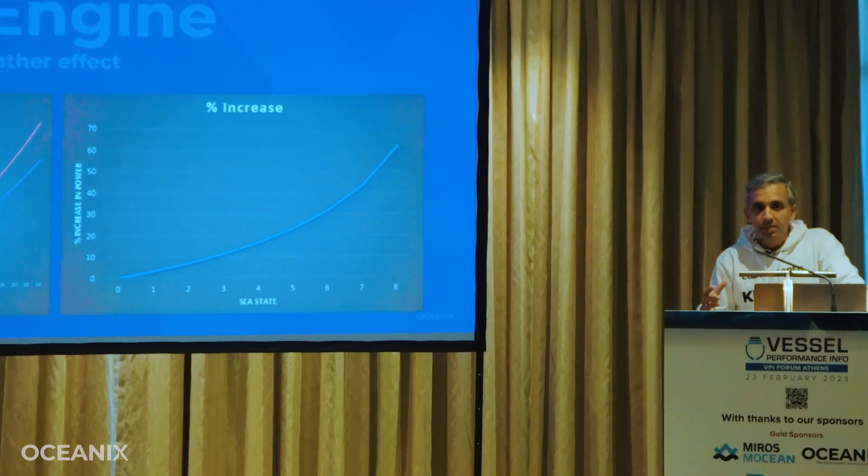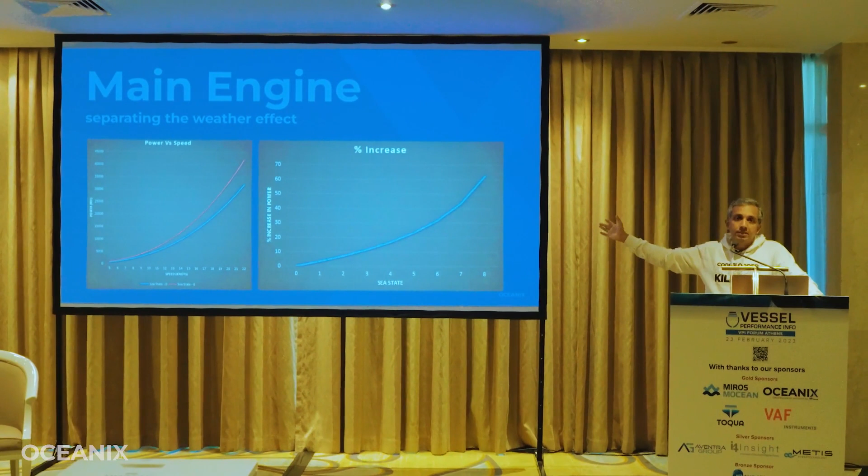So first we will try to understand how we can separate out the weather effect. There is a simple mechanism and there is a complex mechanism. The simple mechanism is you take the sea state as a number to represent it. So on the left side, you can see the effect on the speed power curve by sea state. The blue is sea state 0 and red is sea state 6. So there is a shift in that curve. If you take a specific design draft and a specific speed, you also see the increase in the power due to sea state, say 0% to 60-70% when it comes to sea state 6 or sea state 8. So this is very dependent on both speed and the draft.

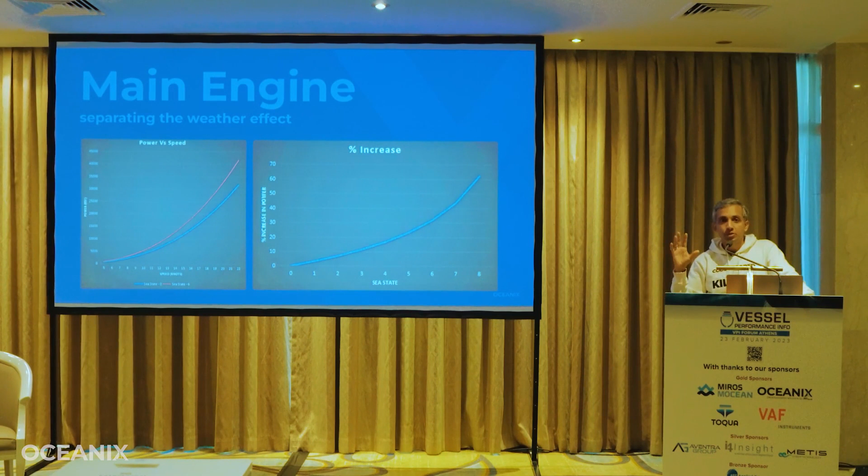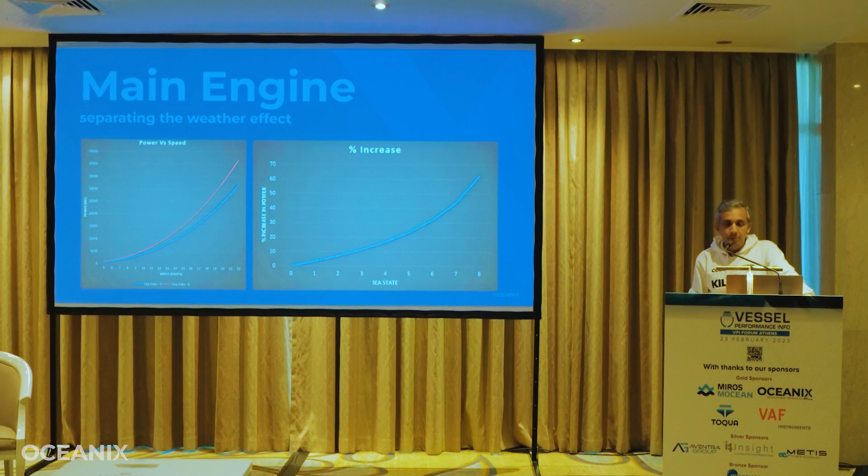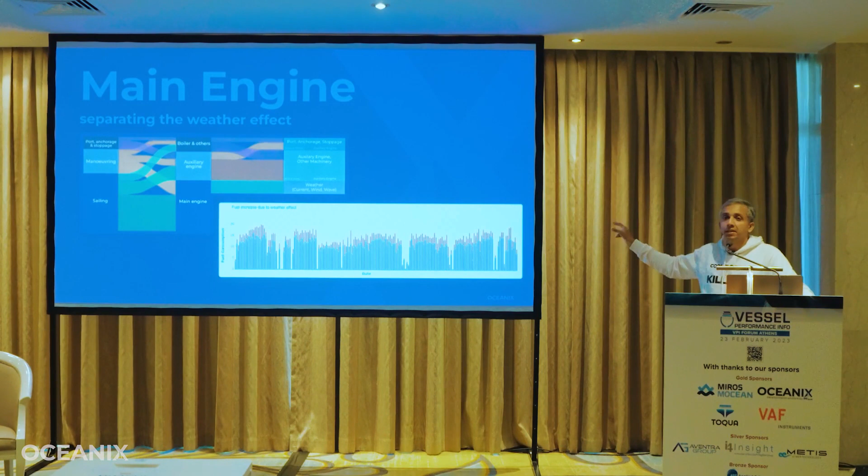You can add one more complexity by taking the actual wind speed and direction and the wave spectrum. I think the previous speakers have alluded to that. So every single day of the voyage, you compute this effective weather, which is shown in red. You aggregate all that for the whole year, and then you add up to find what is my main engine consumption due to the weather effect: the current, wind and wave.

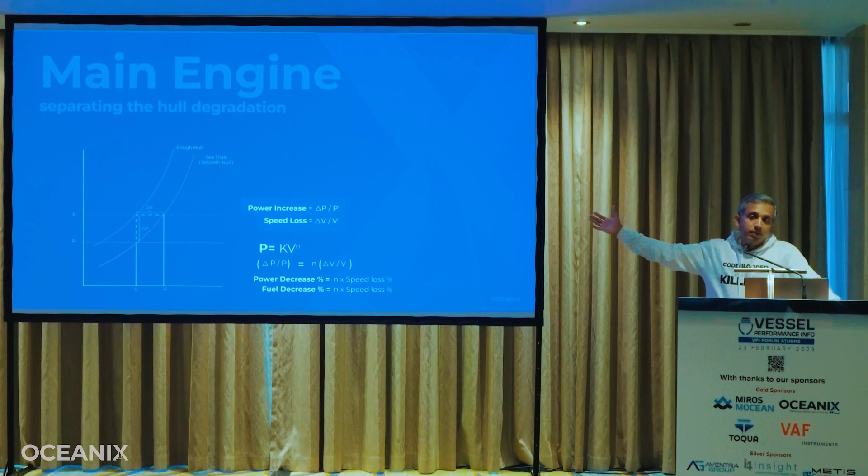So you know that block of fuel is due to this weather effect for the whole year. The same thing with regards to hull and propeller fouling. So we already know about ISO 19030 and how it helps understand the speed loss and understand the change in performance. So we may want to start from there, but then you have to go beyond ISO to find out what is the change in fuel because of that. So the change in speed is what is mentioned there. So you want to shift to the change in power and then the change in fuel thereby, so that you can find the difference in fuel due to the degradation.

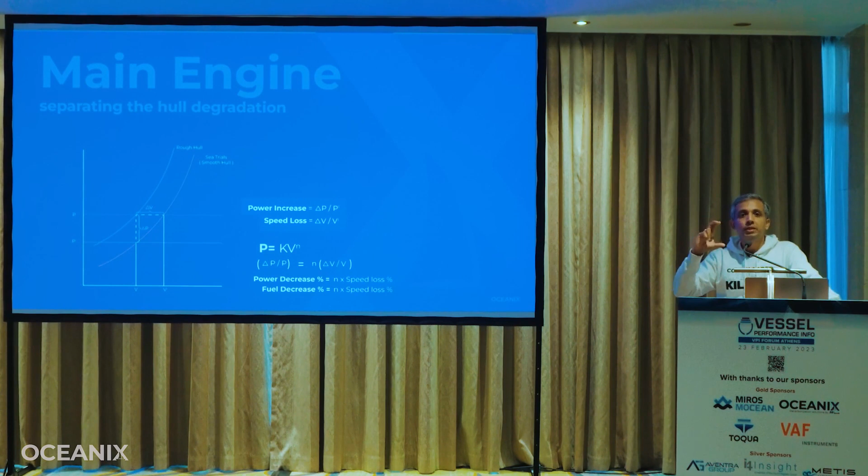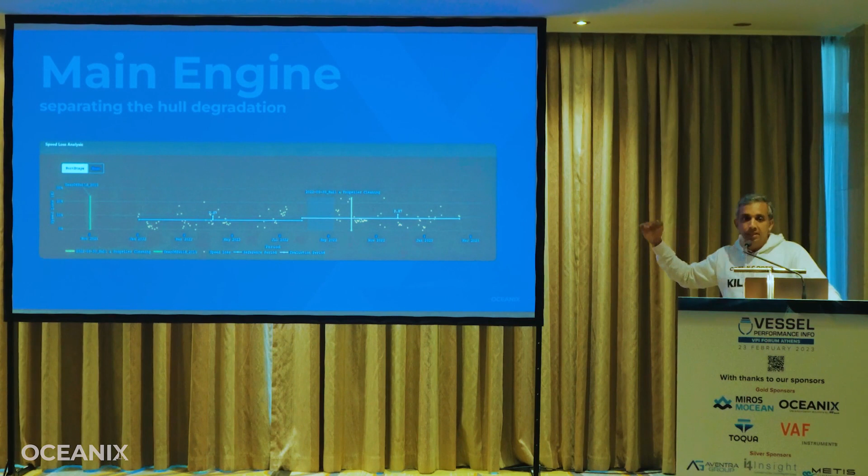And one way to measure this degradation is you plot it down and see the average for the whole year. This is one way. A bit more complex way is, instead of treating this as an average, the degradation will have a slope. So you find the slope and then you find the increased degradation, so that every single day you compute the effect due to degradation, add them all up. For the year you get the block of fuel which is purely due to the hull degradation.

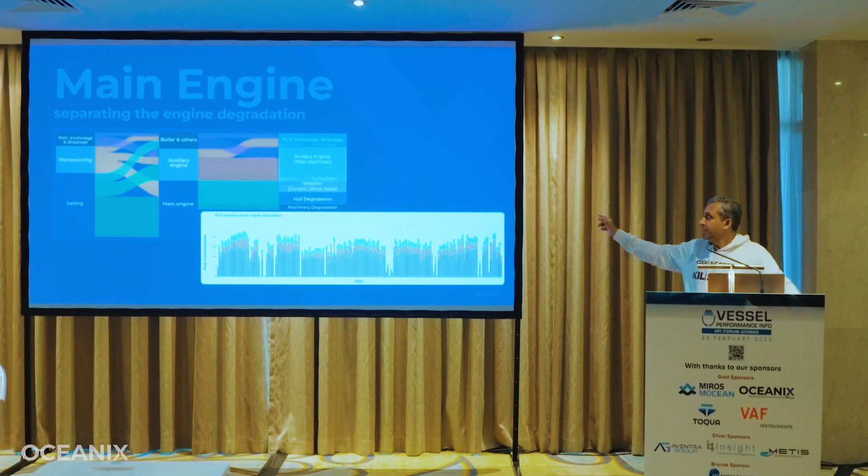Same thing you do for the engine. You monitor the SFOC values, you plot the degradation or shift in the SFOC curve, which is engine degradation. You compute that again for the whole year. The very small violet dots on top represent the main engine degradation, which you will add up for the whole year, and then you get that small part which is machinery degradation.

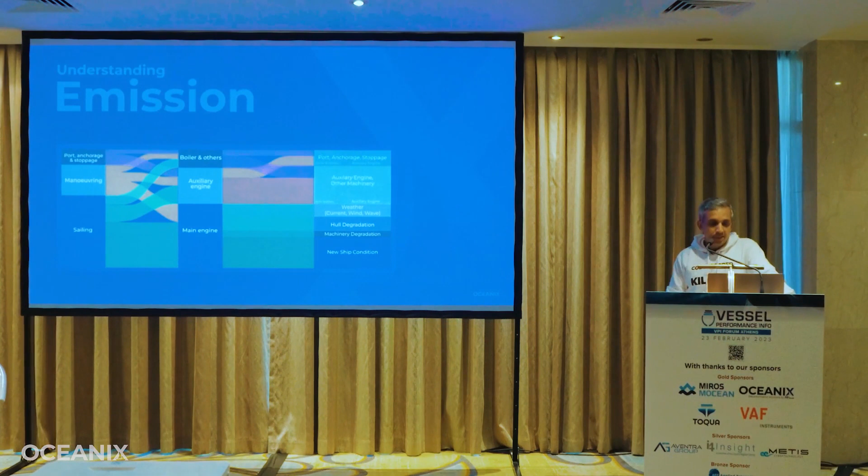So you get the three things separated out, which will tell you which are the three types of solutions you will work on. What remains actually is a new ship condition. So ideally, if you were a new ship, this is what your consumption should have been, going in a very calm condition. So this is the overall breakdown. Once you do, then you will know how you can address it.

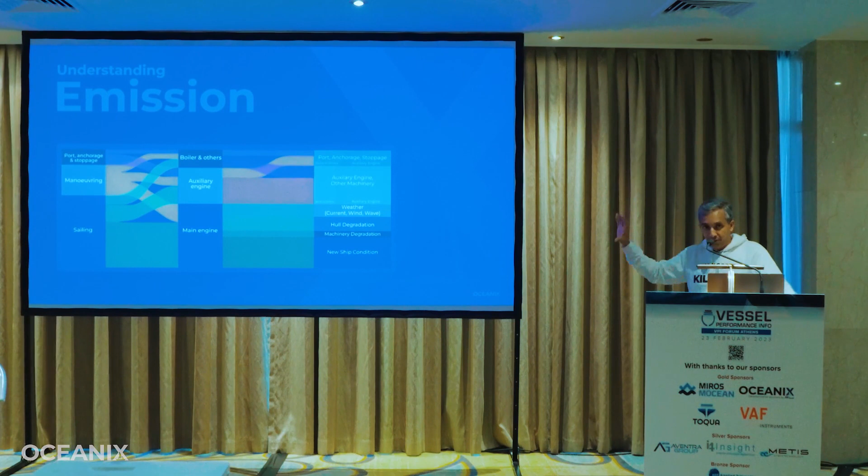The important thing is each type of vessel and each type of operation may have differences in these percentages on each of these blocks. That also helps you understand which area of decarbonizing solution you should focus on, and not broad-base apply the same solution across all your ships. You don't do that. You have to choose the most effective one because it has to give you the correct ROI. So finally we talk about the path towards decarbonization.

So if I quickly summarize, the top part was the port and anchorage. So how do you reduce that? Clearly one way is increasing that sailing percentage, or the auxiliary engine consumption in port you reduce by cold ironing and various mechanisms. This is a small part but may have some limitations because operational constraints are there. But then you also have the auxiliary engine in the sailing and maneuvering condition. You have to monitor the auxiliary engine condition, plus you also manage the load balancing and whether you are running more generators than necessary, etc. These things you can do and manage this consumption.

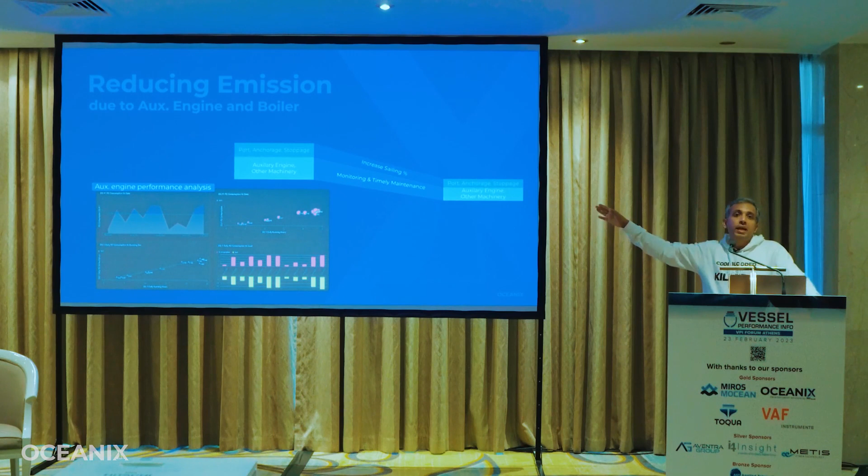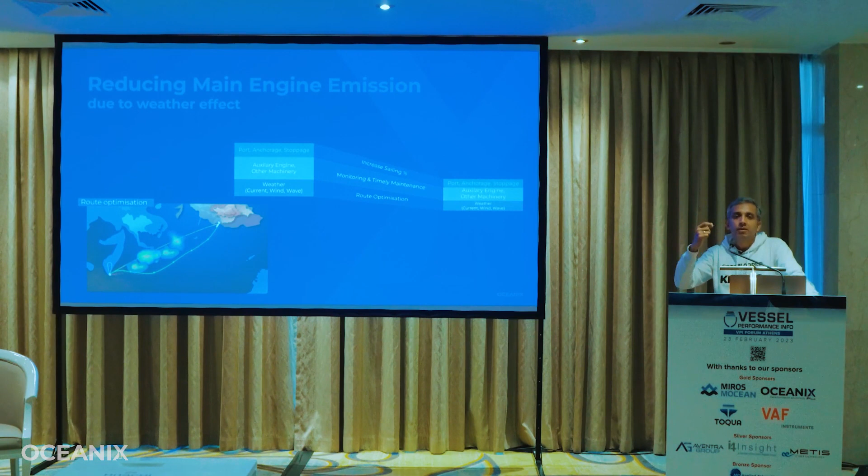Can you reduce the weather effect? Obviously route optimization is one way, but it can save a small part because eventually there is a commercial decision to go from place A to B. You cannot obviously wait for the weather to be calm. You can minimize or reduce that effect to some extent.

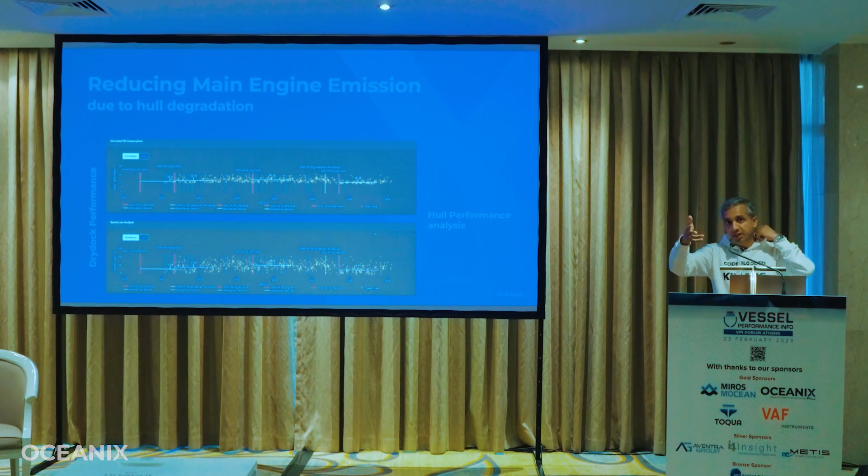Regarding the effect of hull degradation, you may want to monitor the whole thing. So there was an example where the dry dock itself was mentioned. So one way is to assess your latest dry dock compared to the previous one, or you could also assess how good the in-service performance is, like the first year versus the rest, which is what all the paint contracts are written on. So you might want to see this as a mechanism also. And also, when do you do the maintenance? So what we call a maintenance trigger.

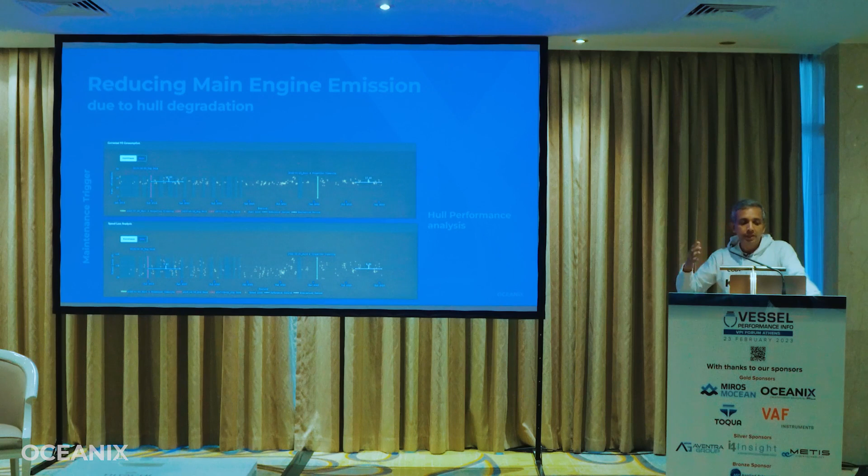So you check the first 3, 6 or 12 months compared to the latest 3, 6, 12 months and decide when you need a trigger. So this is all about hull performance monitoring, which may yield you some benefit in that hull degradation. You may be able to control it to some extent. The same thing with machinery: if you do engine monitoring and timely maintenance, that part of machinery degradation you may be able to manage and control.

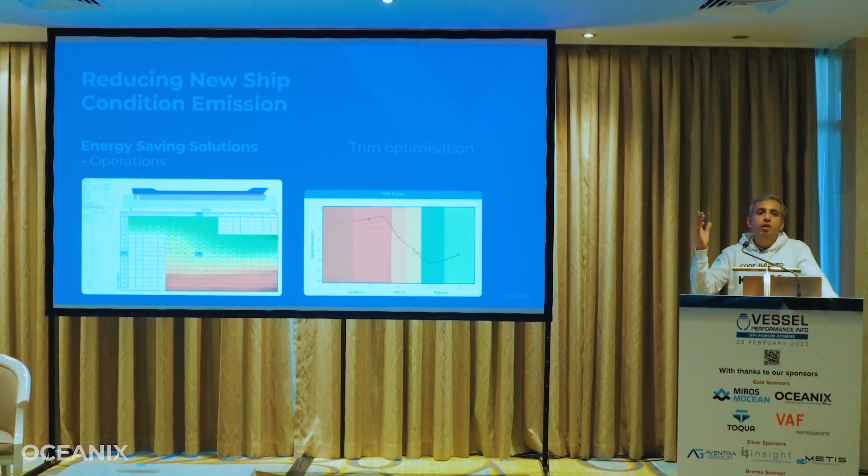Now the new ship condition approach, obviously there are three ways. One is the whole thing about energy saving solutions, then there is renewable energy, and then there is cleaner fuels. So energy saving solutions, again a lot of broad buckets. If I take operations as a way, trim optimization is the easiest thing to do and is a low hanging fruit, maybe 2 to 5% you get by that. There are a lot of things on hull resistance, from the very proven hull coating to the one which is not yet proven very well, which is air lubrication. There are a lot of techniques. You can easily achieve maybe 5 to 10% there.

Or propeller flow conditioning, again a lot of techniques, maybe a bit smaller benefits. Or you have propeller modification. Again, I'm just giving a sweep of all the possible solutions in that space. And then there are maneuvering devices, you may want to try these. Engine, of course, on the main engine side also you can play with these. And auxiliary engine loads, simple things like LED lighting, these again have a small effect, but the key decision is the marginal benefit should be more than the marginal cost. That's a key economic decision you have to take.

So renewable energy is the second type, and here wind has the most potential at sea. This is again a very proven technique. You have a lot of installations happening, and maybe this year there are about 50 odd commercial ships coming out with this wind solution, 5 to 25%, especially in combination with route optimization. Solar is very low potential in large commercial ships, but the investment is low, and the returns are easily measurable and attributable, unlike the main engine solutions. You can measure the power, and typically on commercial ships, not on the RoPax or RoRo, but on commercial ships like tankers and bulk carriers, you can put about 50 kilowatts of solar, and you get that money back in less than 5 years at today's fuel price. So this is a very proven, easy way of getting that small benefit.

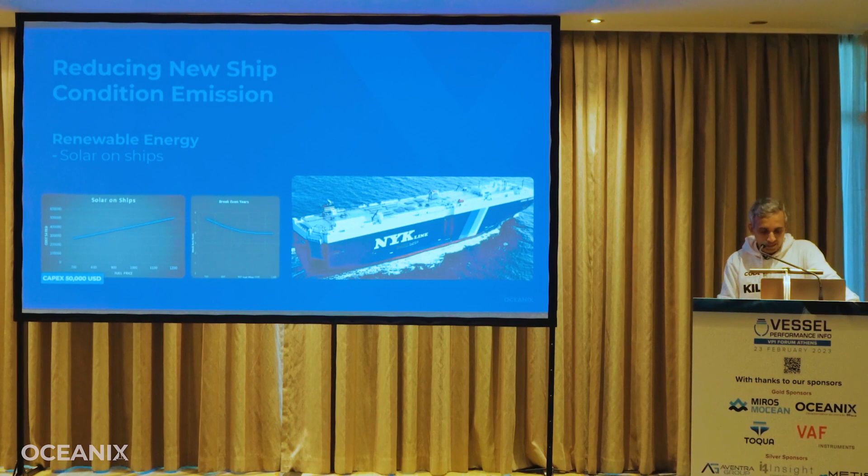Battery tech is not very potential from a storage perspective, but for power shaving, especially in container vessels where you have reefer containers, this might be a good approach. Clean fuels, I'm not going into details. There are so many things available. LNG seems to be the immediate option people are trying to follow. But in the long term, it could be hydrogen. But with all this, finally, you need a way to measure the benefit. So fundamentally, ISO 19030 has given a small part of it. You have to build on top to understand what the fuel saving is, and then build in the fuel pricing to get the ROI. So this is very important for your economic decision on what you should do.

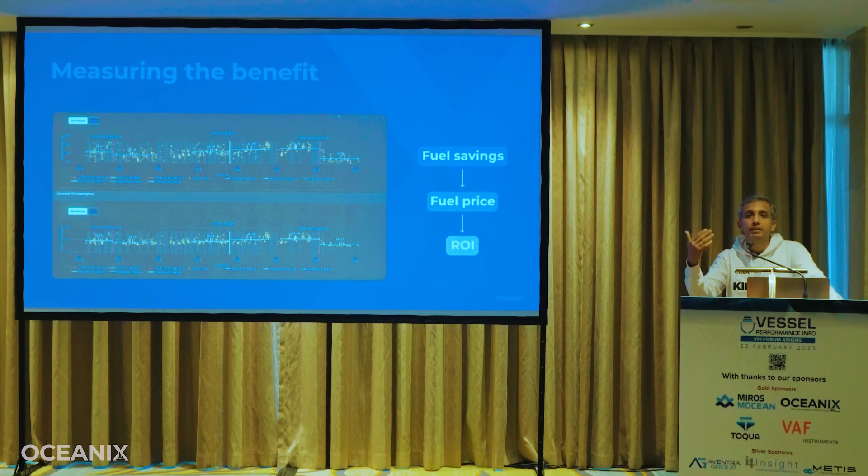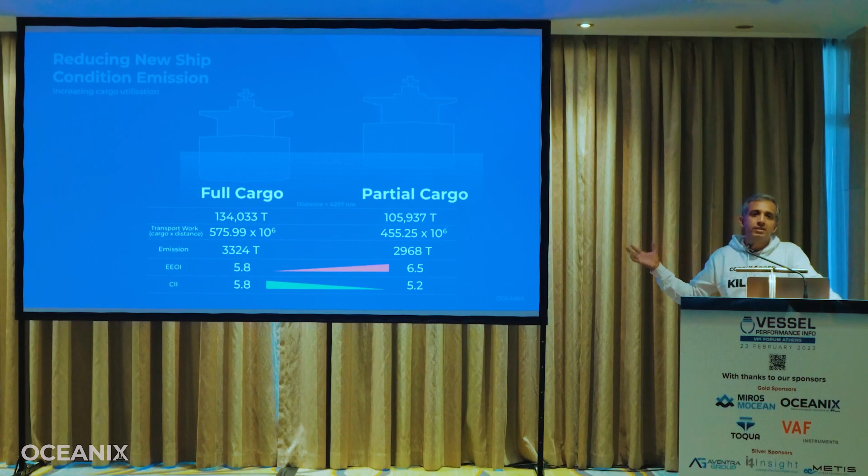And lastly, technically, increasing the cargo utilization makes logical sense. So it's transport efficiency. This is just an example to show when you go from a full cargo vessel to a partially loaded one, the EEOI becomes worse, but CII is improving, which I think the panel will discuss later. But forget the CII. In this case, improving loading will improve your performance and efficiency.